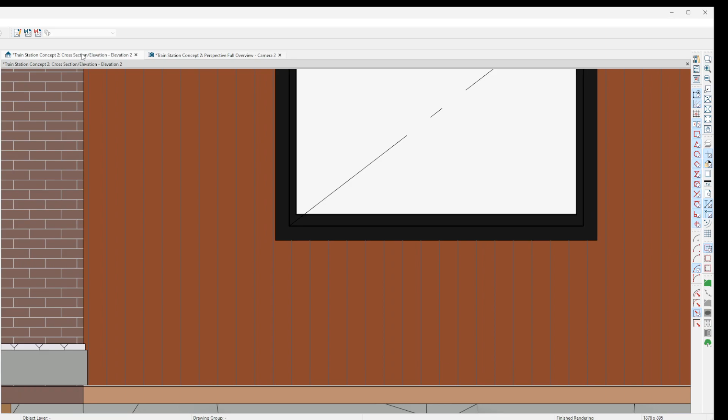As far as the plan itself, I'm going to switch over, move this to this side, and bring this over here so I can show you the floor plan. I'll put this on the computer so you can access it as well. So I've gotten rid of the bar, all of the equipment that was in here.

I did leave the steel posts and that one brick wall so you could actually describe this as a complete brick area. And then this wall could be shortened, I believe. Looking at the photographs, and I'm just a little short on time, but I think this could be pulled back to here. In fact, let's just render it that way for today.

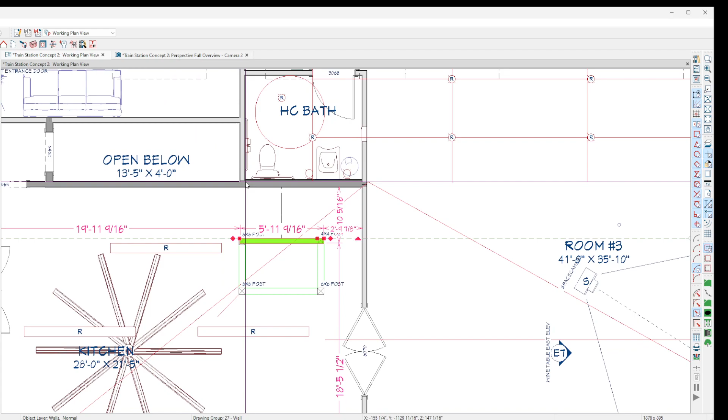So I've got the second handicap bathroom in here. This was just a great place to put it because it didn't start eating into the good leasable space. If you'd like another one down here, or once we get into code issues and figure out we need one, then we can take a look at that.

So I left dining tables in here to add some scale to the room, and it will help as you travel throughout the rest. All I put in here was, like if you come in the door, there's a little decorative plant type thing, and then a couch.

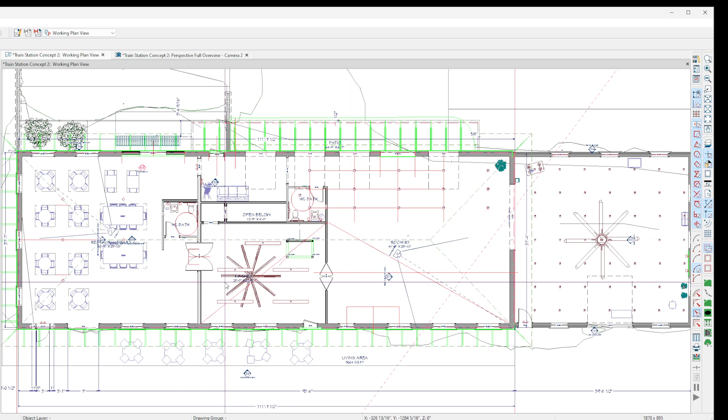There's still a few items in here, but I took out all the gondolas. Basically anything that's left in here—there's a soda machine, let's get rid of that. And one of these is a magazine rack, but that's not a big deal. These are all antique looking. I could add some more to that if you decide that's what you want. And it's just a plant sitting in here, adds a little bit of scale to the whole picture.

So that being said, let's change the rendering style on this so I can move around, because when I'm in this full render, it's very hard to move around.

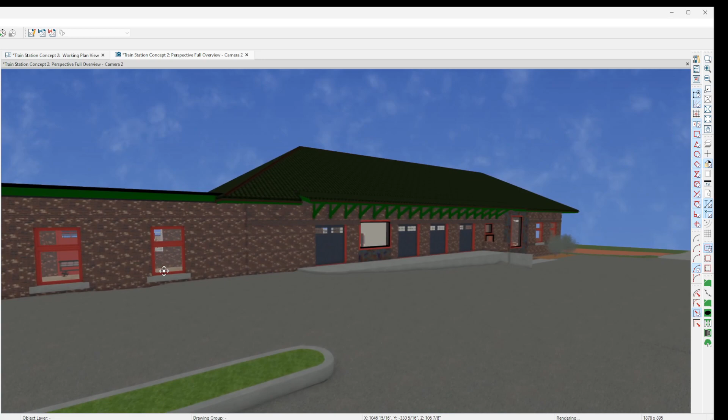So along the front, it's as it is down here. It's just as it exists, and then coming along, on this largest door, I've got some brick trim details to work out.

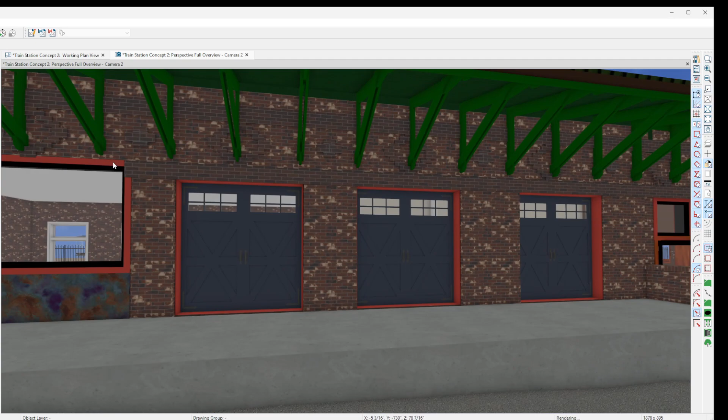That's definitely something to deal with. This is just a patinaed copper, large picture frame window that fills the hole, and then the rest of the doors.

And the main difference in this plan is that there's a retaining wall here, and so a little concrete issue there, but that's just the way that the terrain can sometimes get messy. It just takes time to get it straightened out.

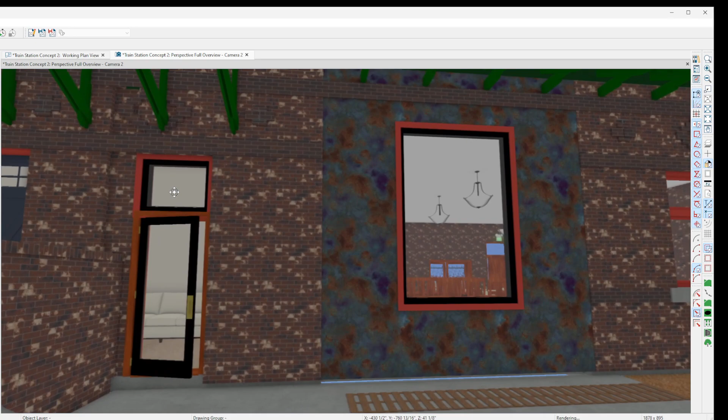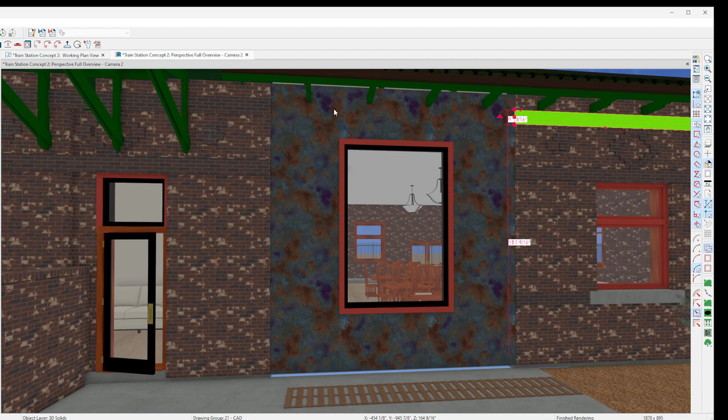So again, this is that large opening, and I filled that with the copper patina—actually this doesn't go there, I was just thinking about that. I saw those in 2D, and without it rendered, it confused me a little bit. These do terminate here, and that was just that trim detail for the brick.

So we'll go on inside. This is that little waiting area, exit sign, so you can go that direction. And as requested, you've got your option to go this direction as well.

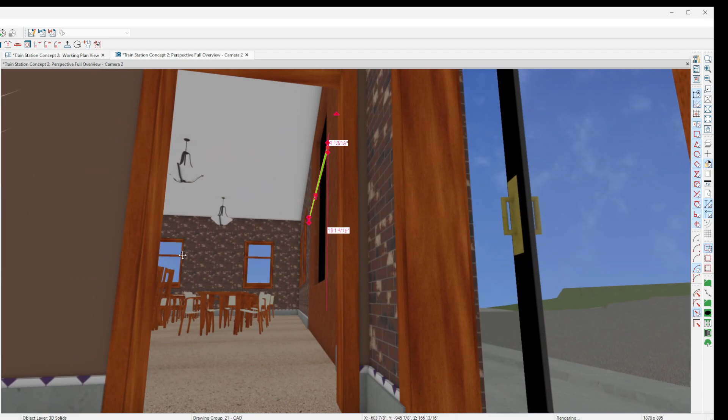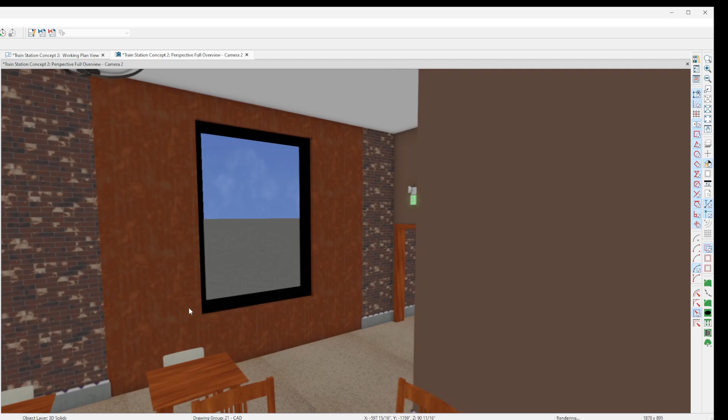So as we come into the dining area, the space is pretty much the same, it just doesn't have anything but the dining tables in it. And then here I put a corrugated copper. I couldn't find a shiny corrugated copper, but when I have time, I could probably make one to make it render really nice. I'm sure you've been to Casa Grande and seen how that corrugated copper turned out up there—it's just absolutely beautiful.

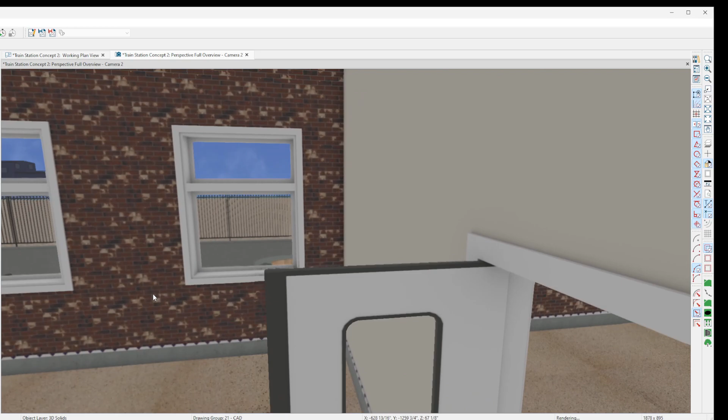In here, it's kept the natural woods. Went ahead and emptied out the kitchen, as I mentioned earlier. We could probably change out this door because I'm sure you'll want something newer.

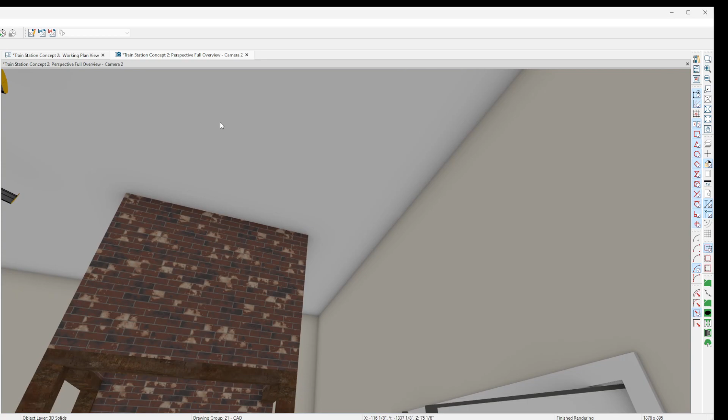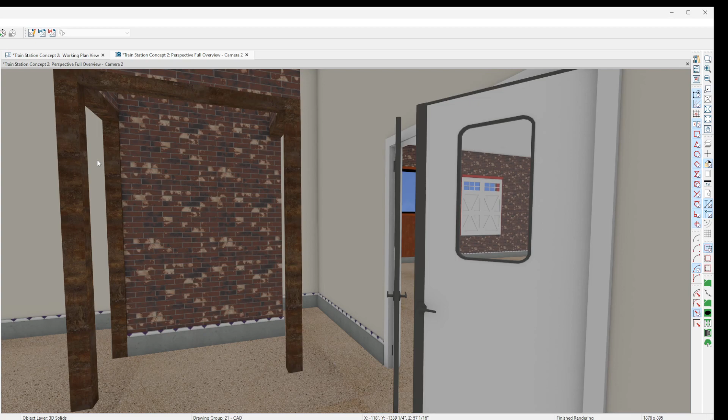And this is that thing that we can explain to your customers, that this is a complete brick structure that goes all the way up to the roof and comes down to the floor. So we would destabilize halfway through, put some temporary shoring in there to hold this up, and then slide steel in place as we knock out the temporary shoring, continuing that process all the way across. So yes, this is a viable solution.

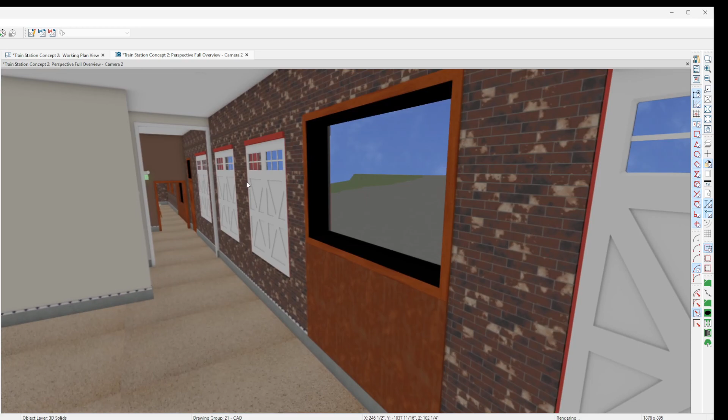Going through, this is just that wide open space, again with corrugated metal. I'm using a UPVC window, these are extremely energy efficient. Since there are some large picture windows here and here, I put those in, and they come in some different colors too. We could probably do a white if you wanted to match, but I'd have to look and see if they have anything that resembles a natural wood grain.

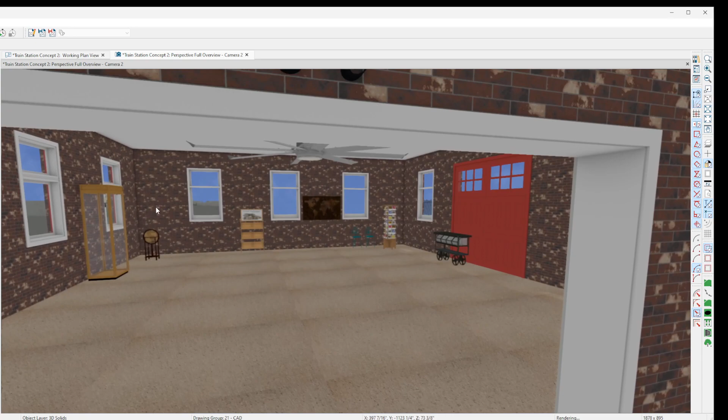So this is just looking out the back at the rail yard, and I kind of left the signage up there, but that's neither here nor there. There's just some antiques and stuff left in here, and there's the large fan. I don't know if you'd want that, but man, they're really nice. They run extremely low speed and just keep circulating air. That's one of the things - just take it out if it's not desired.

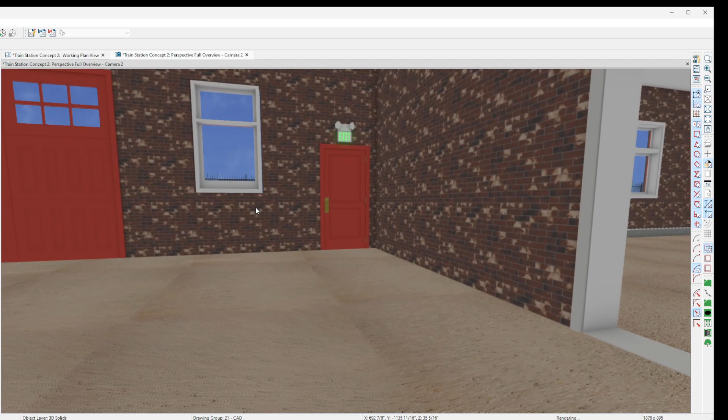And so on through into the back. I'm not sure, because all the pictures I have, every time I go by there, this is snow, so I don't know where this edge ends. We'll get that figured out this summer so I can make it the correct depth.

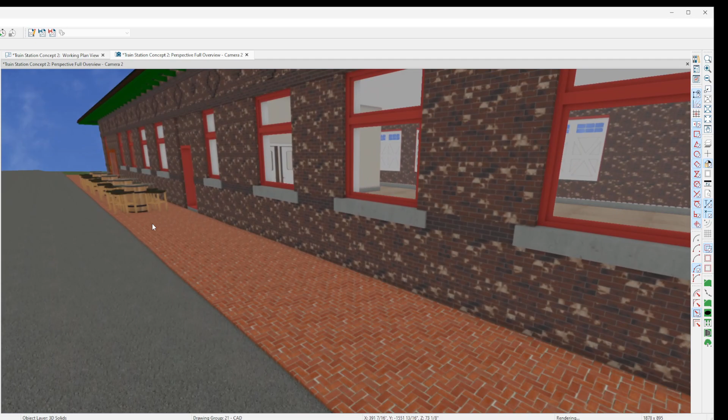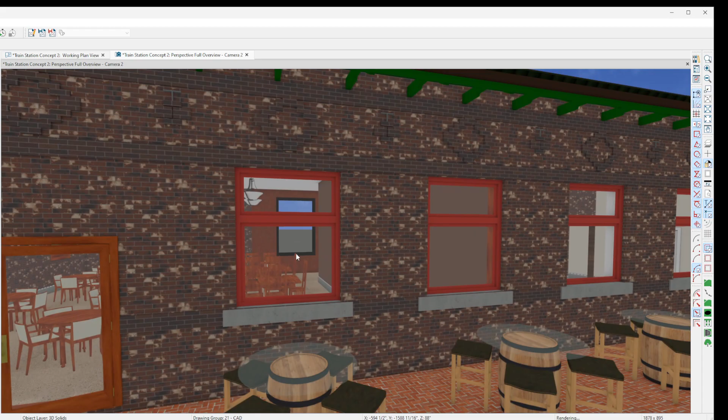There's just some tables and chairs I added to give scale and give that idea. I'll put some tracks and stuff out here, maybe throw a few more cars. We know that caboose is always sitting around here. If you wanted to theme some of this stuff railroad too, we could, such as I could put a large picture here or anywhere. So given just a very light idea, because I don't know.

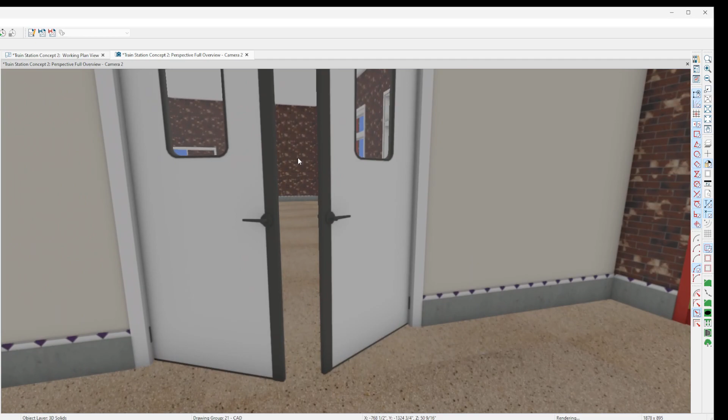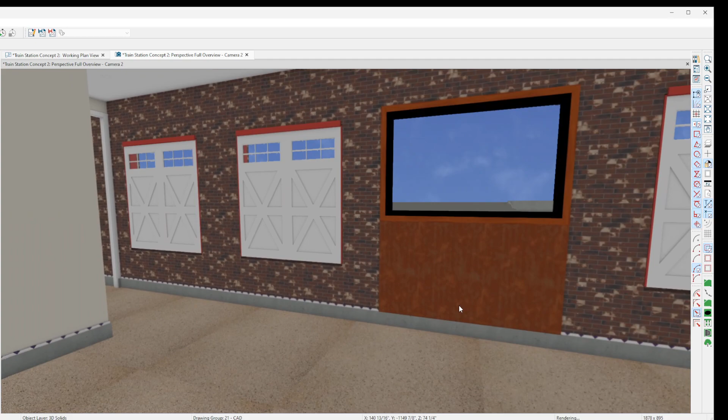There is a rail club in Livingston, and you might talk to them and see how they do it. But if one started here in Butte, I know one guy here in town who is a super enthusiast, and they might be willing to rent one of these spaces and actually turn it into a place where kids can come and look at their model train setups, and they will fill this space with really incredible scenery and stuff. But we'd have to see if there's enough enthusiasts in Butte to consider that type of client.

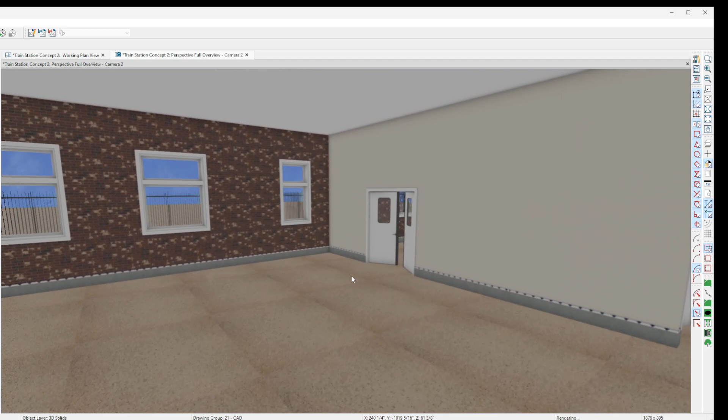So anyway, making just kind of a quick short video. Wanted to get this out to you before I head out, and I will be sending out an email to that regard. I hope this better suits what you were looking for, as far as having a more empty design to be left up to the people you show it to, so they can see what they could do with it.

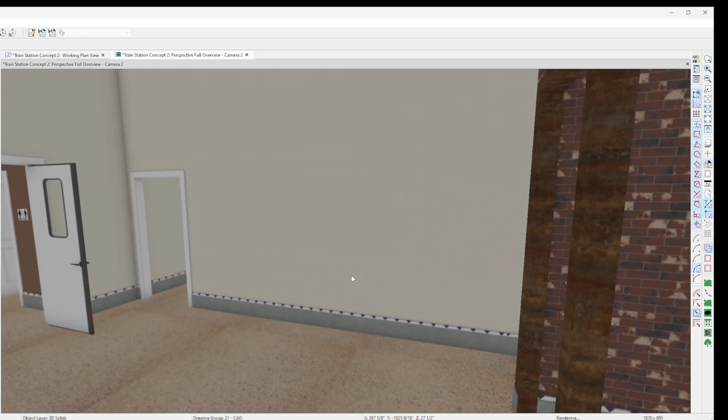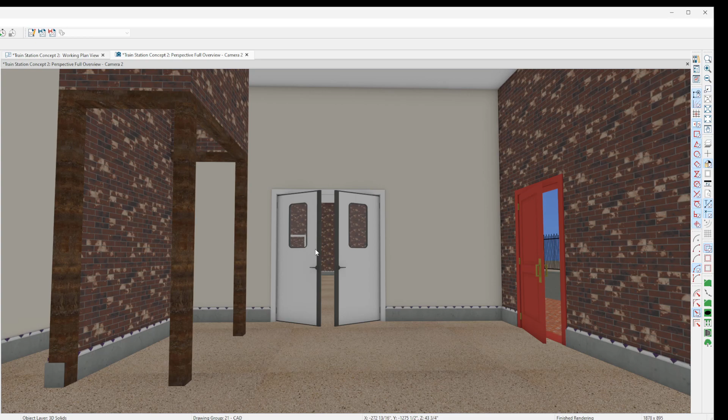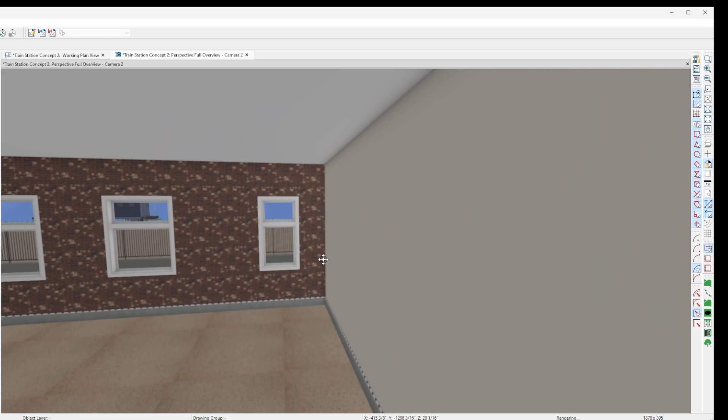And this just is the entry to the stair - that's it, it doesn't go through anymore. You had also mentioned getting rid of these double doors. I left them there, but only because I don't know what you like. Is there no access? I can just do this real quick and show it that way. So the kitchen would have no access to the other side - anything you wanted would have to be brought around and then taken through here. You had stuff from the kitchen being served here, or we can put a standard door in here. So just let me know what you would like me to do with that part, and we'll have ourselves concept two.

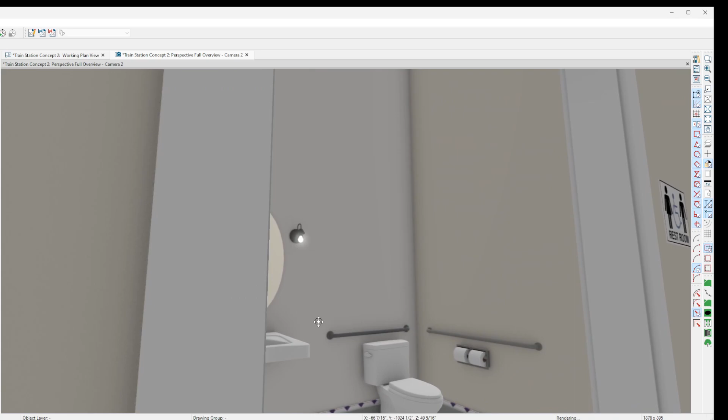Yeah, this is pretty much a duplicate. It's slightly larger just because of the wall alignment than the other bathroom, but just by inches. That had to do with making sure this wall here lined up, because otherwise it would have been just a couple inches of indentation and wouldn't have been quite as pretty.